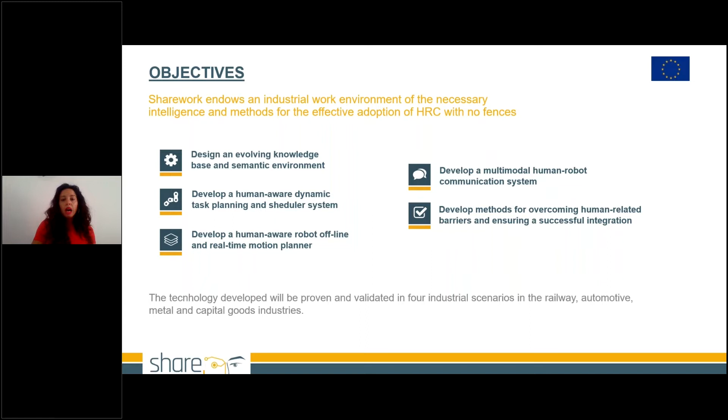Sharework has different objectives. The first one is to design an evolving knowledge base and semantic environment, then to develop a human-aware dynamic task planning and scheduler system, and a robot offline and real-time motion planner. Everything is possible thanks to a multimodal human-robot communication system, and we are also developing methods to overcome all the human-related barriers and concerns that can arise in this field.

Regarding the methodology, the technical activities in our project have been divided into 4 different main areas. The first one is perception. Thanks to different kinds of sensors, the system is capable of recognizing the environment and also the presence of humans and operators. The second area is dedicated to motion planning.

Thanks to our models, the robot is able to recognize what the operators are performing, so which tasks they are doing, and in this way organize itself to have a dynamic planning and scheduling of the collaborative task.

We also dedicate a part to safety and security, especially a module dedicated to safety for humans. Then we have one dedicated to data security, continuous evaluation of ergonomics, and finally operator training with augmented reality.

And finally, as I said before, everything is possible just thanks to the human communication among robots and operators.

So in our project, we have 4 different use cases. The first one is dedicated to the railway sector, led by Alstom. Then we have the metal sector, in which we have Cembre, capital goods, which today will be represented by Goizper, and the automotive one by SEAT.

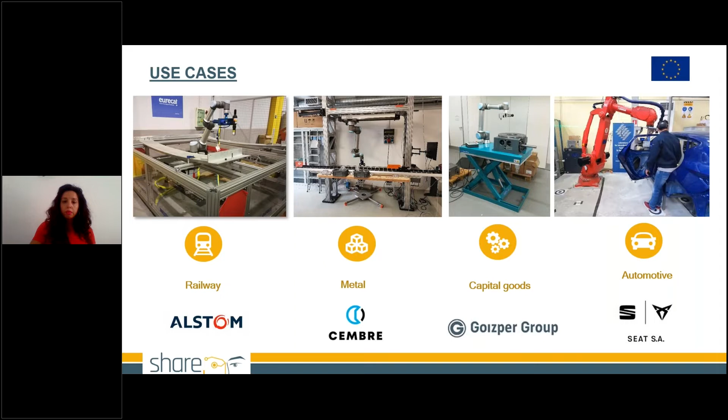So now we are almost at the end of the project. The project will finalize in October, so we are already in the final phase of implementation. And this is why we are here today. Today we are going to see how all the technical activities that have been performed during these 3 and a half years will be integrated directly into the industry.

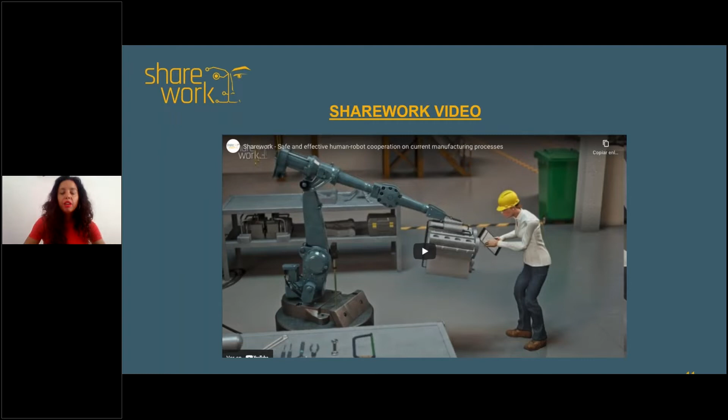In the age of Industry 4.0, the industrial landscape is being transformed by technologies, allowing factories to be more connected and automated. Industrial robots have evolved considerably during the past decades, improving in productivity, efficiency, and security. But they are still not flexible enough to coexist and share production tasks with humans.

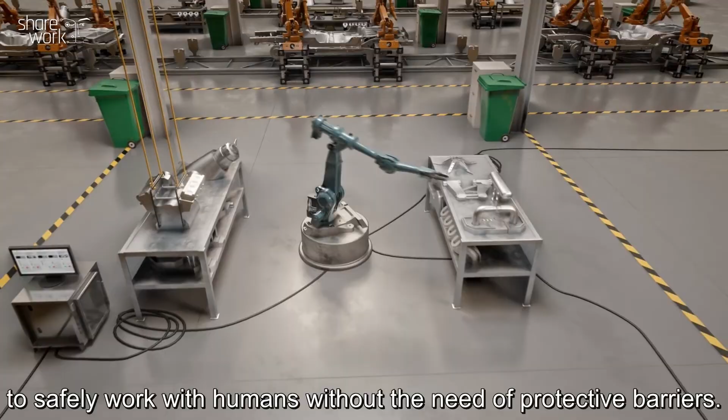The EU-funded project Sharework aims to provide robots with the necessary intelligence to safely work with humans without the need of protective barriers. Thanks to Sharework, industrial collaborative robots will be capable of understanding the environment and human behavior.

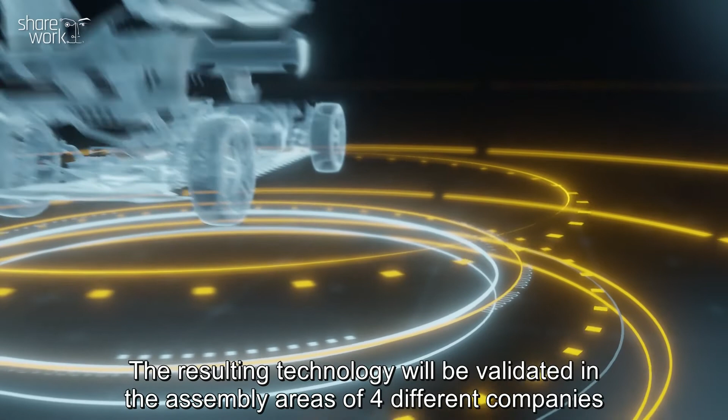A solution to boost process productivity and improve workers' well-being with better ergonomics and safety at the workplace. The resulting technology will be validated in the assembly areas of 4 different companies of the automotive, railway, metal, and capital goods manufacturing industries to evaluate its applicability in different industrial processes.

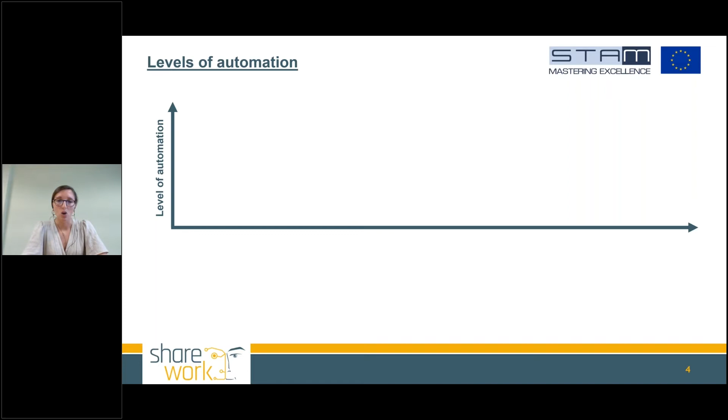Starting from some basic concepts about human-robot collaboration, we can say that generally we can divide the manufacturing process into different categories depending on the level of automation. We can start from a level of zero automation, that is manual manufacture, and arrive to a level of fully automated production lines. In the first case, the main character is the human operator, while in the second case, the work is completely carried out by robots or automatic machines.

Each different type of manufacturing has different features depending on the skills of humans on one side and robots on the other side. For example, manual manufacture is flexible since humans are able to adapt to changes, for example in the product they are manufacturing. Human manufacture also has dexterity, since human hands are able to perform complex tasks and manipulate different types of objects easily. Then, of course, there is the decision-making capability of humans.

Regarding some drawbacks of manual manufacture, humans can make errors, and there is the health risk of operators, mostly related, for example, to ergonomics or to performing heavy tasks.

Regarding full automation instead, the advantages are increased speed and quality of the products due to the introduction of robots. Regarding cost, robots are cheaper than humans, but they require a high initial investment. Another drawback can be the limited adaptability of robotic solutions that are often tailor-made for specific processes and cannot be adapted to changes. In this context, human-robot collaboration is born to fill the gap between these two different kinds of manufacturing processes.

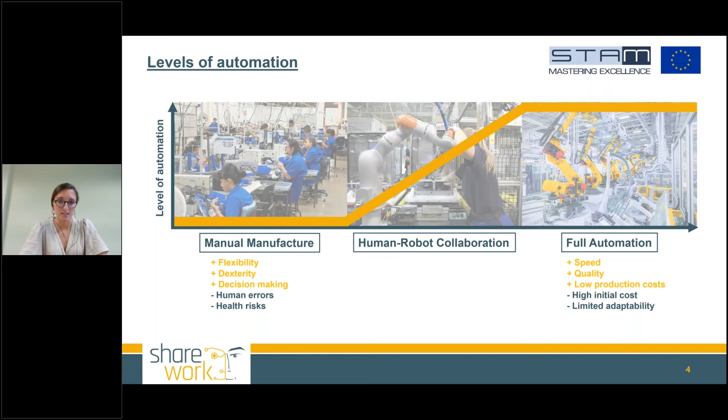But what is human-robot collaboration? We can say that human-robot collaboration is when humans and robots share their workspace. The robot helps the human operator in the most uncomfortable, non-ergonomic, and dangerous tasks, while the human operator works as a supervisor and in all the tasks which require human skills.

So robot and human can work together, and in this way it is possible to integrate the advantages of both manual manufacture and fully automated production lines. Each one brings their own features to the collaborative process. The robot aims to increase efficiency and productivity, since robots are really fast and very accurate, while humans bring flexibility, dexterity, and cognitive capabilities to the process.

Going into more details, there are 5 different ways of interaction between human and robot, and they depend on how they share their workspace. We can start from fenced robot, where there is a fence separating the workspace of the robot and of the human. In this case, no contact between them is possible.

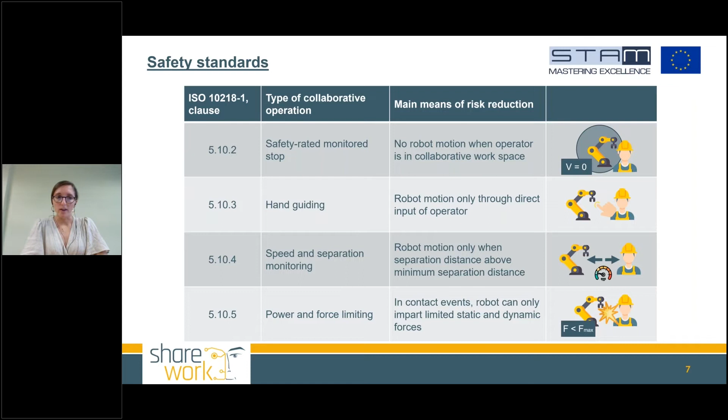Collaborative scenarios should include at least one of these 4 safety modes.

One last aspect I want to introduce today about human-robot collaboration is collaborative robots. Collaborative robots, or simply cobots, are robots which have been specifically designed to work with human operators. They are characterized by technologies which allow avoiding any injuries in case of collision with the human operators. Some of these technologies are, for example, force feedback, collision detection, or even soft and round edges of the robot.

If we want to compare robots and cobots, we can say that robots are ideal for large companies producing large batches of the same product for years, while cobots are designed to work with low volume and high mixed production, where the robot is often reused in different processes.

Then robots have complex deployment because they require extensive programming knowledge to be set up, while cobots are easy to set up even by users who don't have extensive knowledge in robot programming.

Then robots are not safe without protection, so they require a safety fence to keep the human worker outside of the workspace of the robot, while cobots are designed to work with humans, so they don't require fences and the human is safe with them.

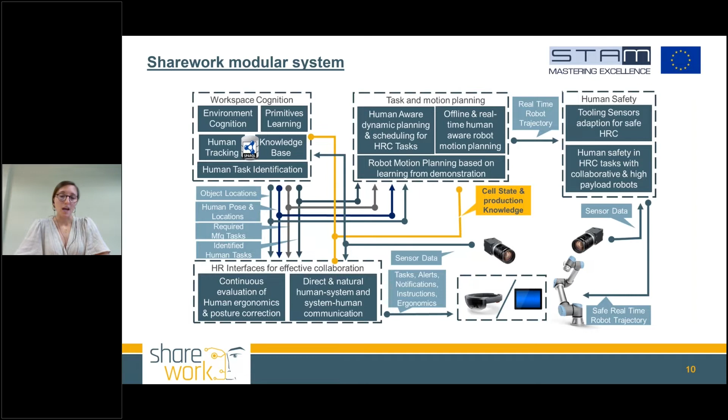The Sharework project aims to create an innovative industrial work environment characterized by the necessary intelligence for the effective adoption of human-robot collaboration without fences. The system is modular and composed of 14 different modules developed by the different partners of this project. The modules can be grouped into different categories: workspace cognition, task and motion planning, human safety, and interfaces for effective collaboration.

These different modules interact with each other and with the surrounding environment, like with cameras, interfaces, or the robot. In all these categories, we take into account the different aspects of human-robot collaboration. So going deeper into each category, the first one is workspace cognition. The purpose of this category is to generate information from the surrounding environment and from the data captured by cameras and other sensors, so the system is aware of the environment and understands where the operator is and what the operator is doing.

We have a module that computes the real-time trajectory of the operators, that is the human tracking module. Then we have a module that identifies which task the operator is carrying out, the human task identification. For example, you can see in the picture that the system is able to understand that the operator is spreading silicone.

Then we have the environment cognition module, which allows detecting and recognizing objects inside the workspace, for example working tools. And we have the primitives learning module, which allows recognizing gestures that the operator is doing, maybe to give commands to the system.

All these modules and the information they capture are used to update the knowledge base of the system, which represents the knowledge of the whole system, and it is updated in real time with the information captured and computed by the other modules.

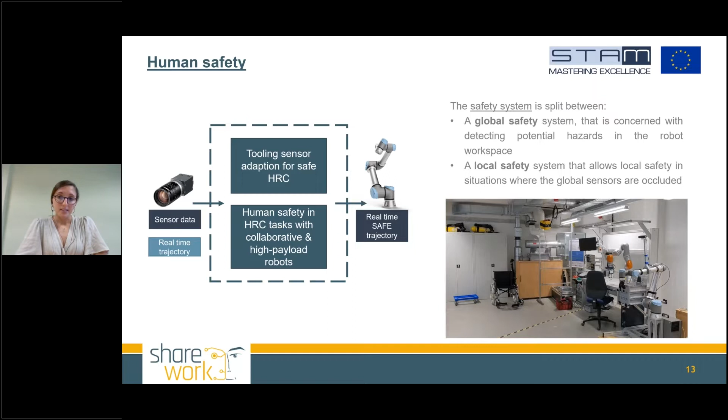The last category of modules addresses another fundamental topic of human-robot collaboration, the communication between human and robots. We are interested in communication on both sides: from the system to the operator, to visualize interesting information so the operator is aware of what the system and robot are doing; and from the operator to the system, since the operator may want to give input, feedback, or comments to the system.

In Sharework, it is possible to integrate different types of devices as interfaces for communication between humans and robots, like tablets, smartwatches, or augmented reality glasses. All these kinds of devices allow effective communication between the Sharework robotic system and the operator.

So to conclude, we can say that in the last decade, many research efforts have been focused on human-robot collaboration, especially in industrial environments. The motivation behind this is that human-robot collaboration is really attractive for industrial scenarios because it combines complementary strengths of human and robotic skills, leading to more attractive work environments characterized by increased productivity, flexibility, and adaptability. However, the wide deployment of human-robot collaboration in industrial applications faces big challenges, and the safety of the human operator is always the first concern.

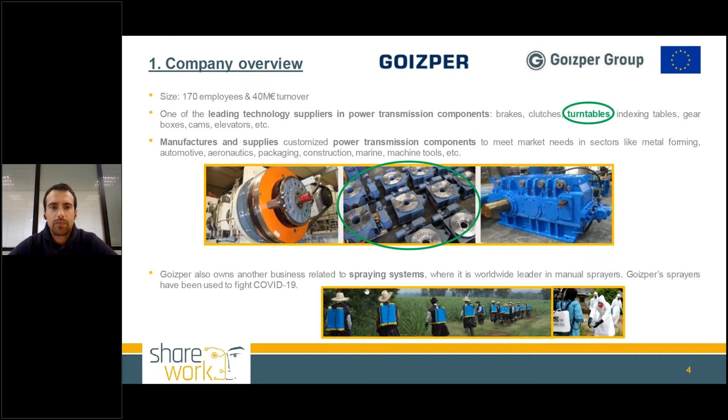So going through the use case, this is a short overview of it. As I told you, this is a turntable, the power transmission component we are manufacturing, and nowadays the assembly process is totally manual. With Sharework, we will reach a collaborative area where the operator you see here working will be collaborating together with a cobot and a servo motor.

We have defined two scenarios where we see a need to improve the ergonomics of the operators, as we will see later on. The first scenario is the bolt tightening scenario, where nowadays it is done manually, but we will have a cobot help. The second scenario is the quality control that nowadays is done by the operator alone, but in this case we will have the help of a servo motor.

The main features of the use case are these four points. As Francesca said in her presentation, the main objective is to have 100% safety. Safety must be assured all the time. But then we also have the real problem, which is the ergonomics of the operators. We have many sick leaves due to operators' pains, back pains, arm pains. So we want to reduce the physical effort of the operators in both scenarios.

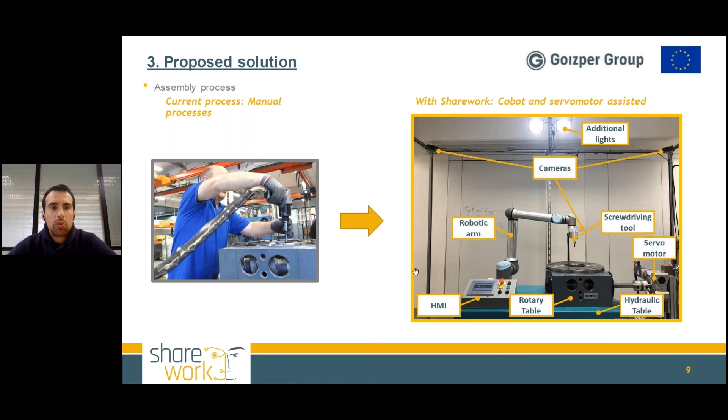As I said before, the first scenario is the bolt tightening. During the assembly of the turntable, several bolts must be screwed. Nowadays, the operator is doing it one by one, and it is not a high load task, but it is a very repetitive task that finally affects the operators.

With Sharework, the next scenario has been proposed, shown here at the bottom right of the screen. The operator will continue introducing the bolts in the holes, but it will be the cobot responsible for detecting whether there is a bolt or not in the hole. After recognizing it, if there is a bolt, it will introduce it and screw it with the correct torque.

For sure, operator and cobot will be working in the same area. So if the operator gets closer, the cobot will slow down, or even stop. As you see, there is an electric wrench at the arm of the cobot that will be responsible for screwing the bolts.

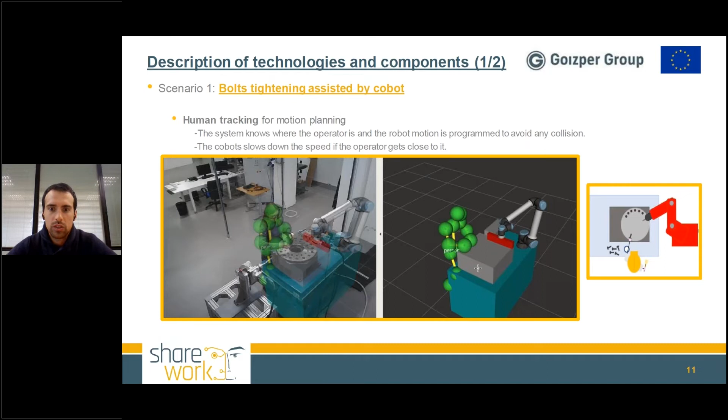So there is a collaboration because they are working in the same area, the cobot and the operator. It is very important to have cameras to track the human all the time, to know where the human is, and to slow down if the human enters the cobot area. As I said in the last slide, safety is first, so no collisions are accepted.

The second scenario is based on the control of the internal components of the turntable. There are some internal components, cam followers, rotating inside these two windows, and it is very important to check how these followers are rolling. For that, nowadays we work this way: the operator turns the shaft, the input shaft, and meanwhile, using the mirror, checks how these cam followers are rolling within the turntable.

The turning of the shaft is very hard. We are talking about 120 Newton meters, sometimes more, and it's a point that we want to remove from this activity. The idea was to have the operator focus only on the quality and the checking of the rolling.

For that, we have inserted a servo motor, because nowadays cobots don't have enough torque to move this kind of shaft. The idea is for the operator and the servo motor to work collaboratively. There will be communication between the operator and the servo motor through gestures, and the servo motor will actuate according to the gestures of the operator.

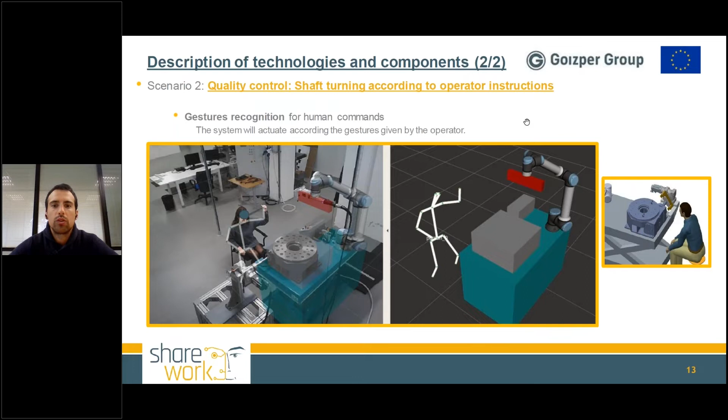Here we can see how the cameras are detecting human gestures. For example, if the operator raises the right hand, the turntable will turn in one direction. If we raise the left hand, the turntable will rotate in the other direction. In this case, the operator is not moving any high load, and is focused only on the quality inspection.

Well, these are the main KPIs. After seeing both scenarios, I'm going to mention only the main KPIs, because there are many apart from this. But as I said before, the main pillar of Sharework for us is safety, and we cannot accept any collision between human and robot, or robot and the environment or any other device.

Then we have ergonomics, our main problem is totally due to the ergonomics of the operator, so we want to reduce the repetitive loads. In the first scenario, it was the bolt tightening, going from 50% to 25% of the cycle time, because the cobot will be the one screwing the bolts.

In the second scenario, we will reduce the high load of turning the input shaft from 90% of the work that the operator does now, to 0%, because the operator will not turn the input shaft anymore.

And finally, we have another main KPI, but let's say it's in a secondary step, that is due to productivity. We want to reduce, if possible, the current productivity time. In the first scenario, we are looking for a cycle time of 60 seconds, and 10 seconds per bolt screwing. For the quality inspection, nowadays we do this task during 1 hour, 60 minutes, and we want to reduce it to 45 minutes.

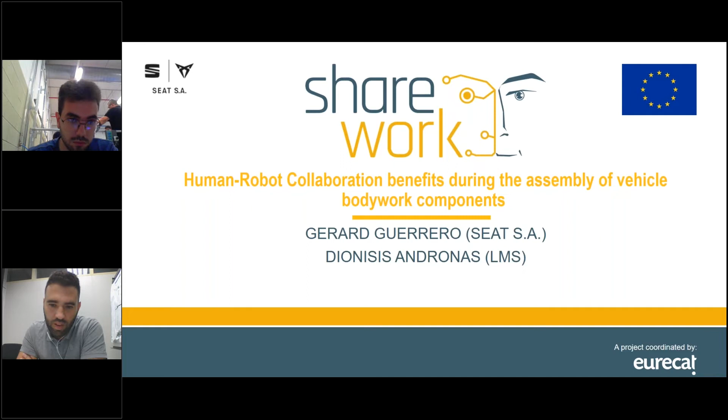SEAT are the only company that designs, develops, manufactures, markets, and sells cars in Spain. Part of the Volkswagen Group, it sells its vehicles under the SEAT and Cupra brands, while SEAT Mo is the business unit which covers urban mobility products and solutions. Currently, here in Martorell, we manufacture vehicles from SEAT, Cupra, and also Audi, and we can manufacture up to 500,000 vehicles per year.

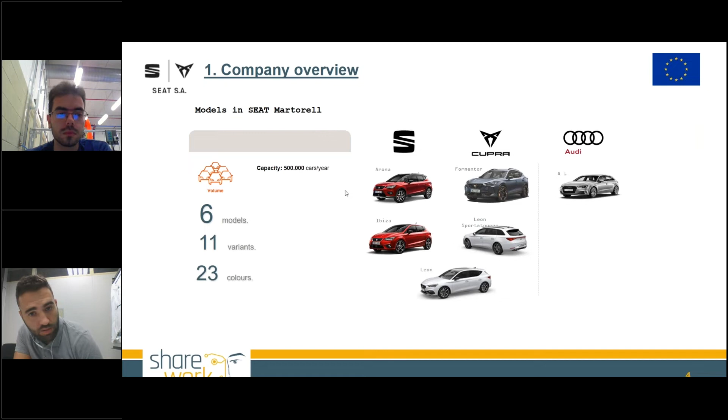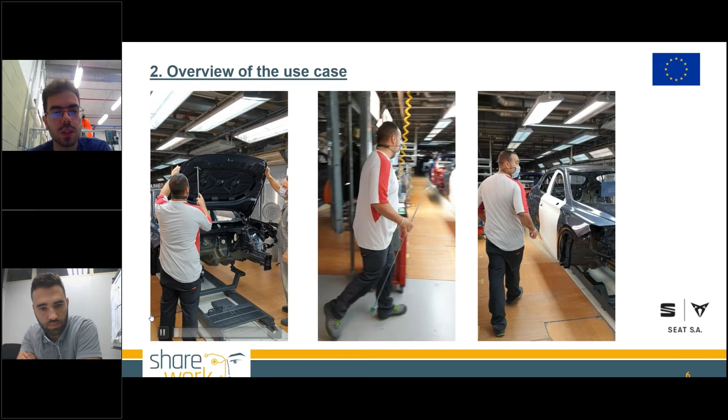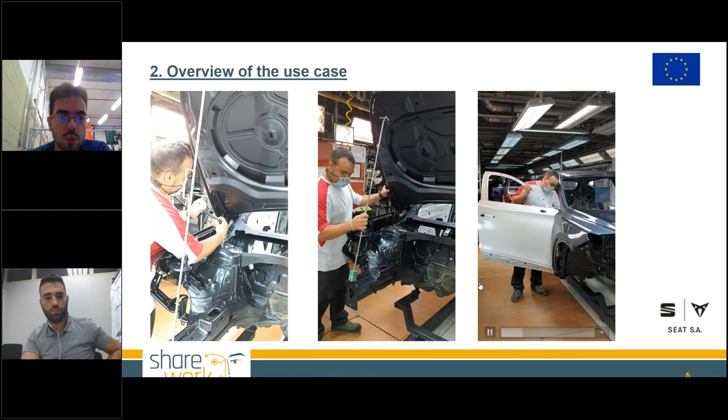Thank you, Gerard. Well, the use case deals with the assembly and also the disassembly of body part components from vehicle chassis as they arrive before the paint shop. The operators have to pick parts from the storage area or the buffers and transfer and finally assemble them on the vehicle chassis as they move on the conveyor system. Those parts weigh approximately 15 kilograms, so we understand that this process for a complete shift emerges serious problems.

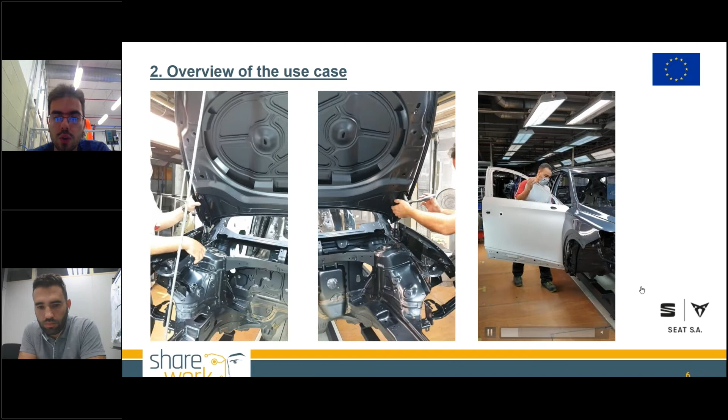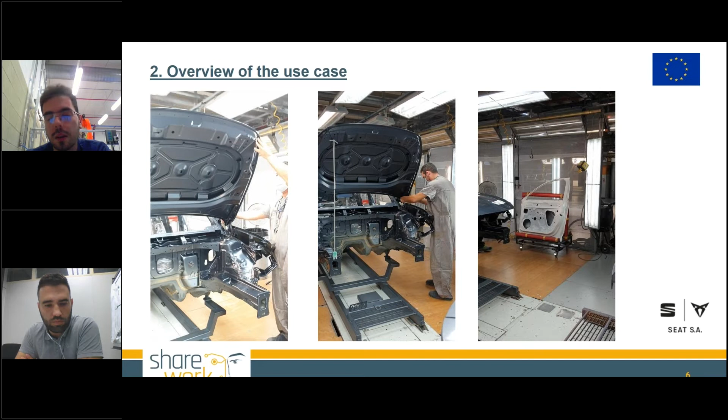For this scenario, we see that the operators are working on the hood, but also on the car doors, and also on the tailgate of each car. They may assemble those parts before the painting process, or they might disassemble those components from chassis that have already been painted, but defects have appeared and they need further processing.

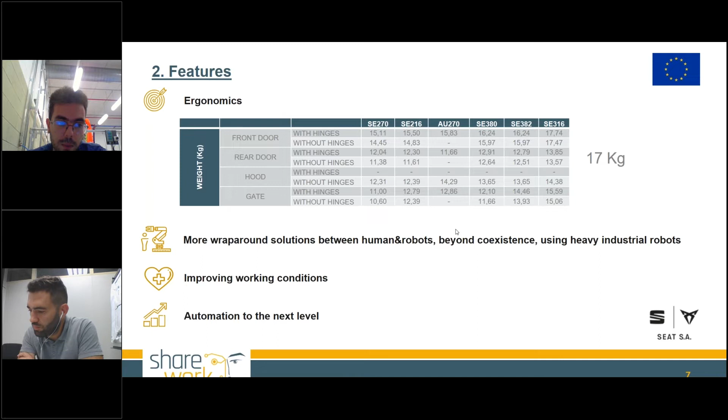Summarizing this scenario, we can see that there are some ergonomic issues. The majority of the parts, as mentioned, weigh over 15 kilograms, with some of them weighing over 17 for some vehicle variants. This emerges serious ergonomic issues. So we want to improve working conditions and also introduce automation for optimizing the process and also optimizing the well-being of the operators.

A few words now about the proposed solution of what Sharework would like to bring in this concept. Here is an overview of the demonstrator that has already been implemented at LMS. We are using a high payload robot to handle the transportation of heavyweight components from the storage area to the chassis and vice versa. At the same time, we keep an operator in the loop because operators have flexibility, and also their cognitive skills are ideal for handling some of the challenges of this case, such as the low repeatability in the positioning of the chassis, and also the high number of variants in the same line.

We have to mention that a huge challenge of this case is the assembly of those components to the chassis, the doors to the chassis, because we have to perform a dual peg-in-hole process in parts whose relative position has a lot of variance. So we have developed a series of solutions within the project. In terms of hardware, we have developed specialized tools for this process. We have designed end effectors that are sensory enhanced in order to support all of the functionalities that we are going to discuss in a few slides, and also they are able to handle the manipulation of variant components without any hardware modifications.

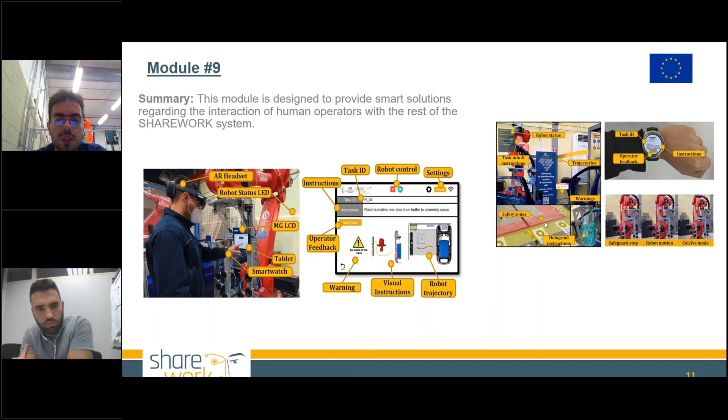Those interfaces now offer a huge variety of available modalities, either for human-system interaction or system-human interaction. Depending on the preferences and also the experience level of the operator, we can have instructions or robot information, safety notifications like trajectories of safety zone arrangements that can be provided to the operator with different means, and also be customized to a huge extent in order to have a more personalized system.

In this case also, we have implemented and tested the data security module of Sharework, which as a module aims at ensuring human safety in case of a detected cybersecurity threat. And for this case, we have also—sorry for the background noise, but we are at the factory.

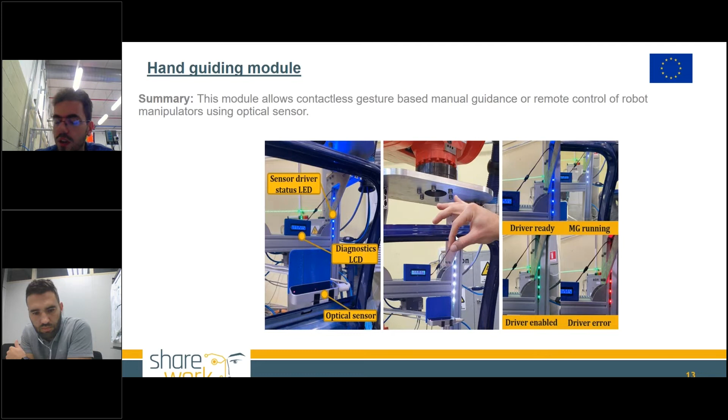In this case, we have also implemented the manual guidance system that uses an optical sensor, and through a pinching gesture, the operator is able to seamlessly manipulate the robot and fine-tune the position in order to perform the peg-in-hole process that was described. We have also implemented the safety system based on Pilz SafetyEYE, with dynamic safety zone reconfiguration depending on the position of the robot and the context of the current executed task.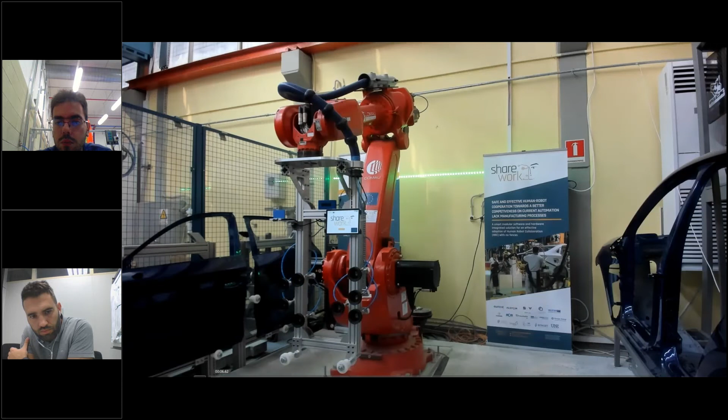Now we have some videos of our experimental setup. Due to timing, I will skip some details. Here we can see the robot being able to grasp the components. At the same time, the trajectory of the robot is visualized inside the operator's field of view, along with the current safety zone configuration, in order to avoid any hazard situation and also avoid unexpected stops of the robot due to human intervention in cases where it shouldn't occur.

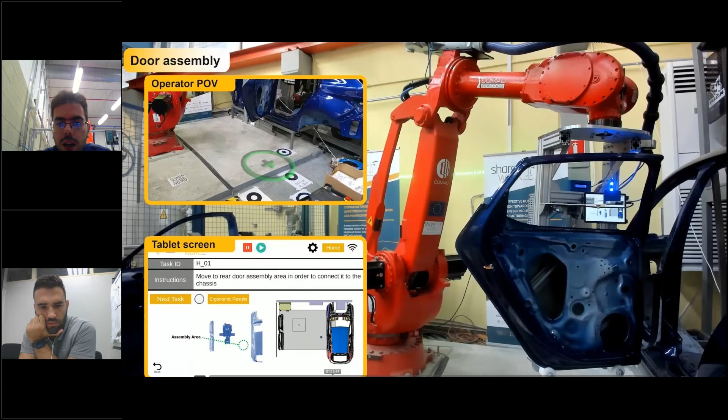Here is the robot transferring the part. We may move on a little bit, and at this point we can see the operator using a pinching gesture to fine-tune the position of the robot in order to perform the dual peg-in-hole process. The operator optimizes the position and finally guides the component to its final position. When this operation ends, the operator performs manual tasks like fastening screws, and augmented information is used to support novice users during runtime operation.

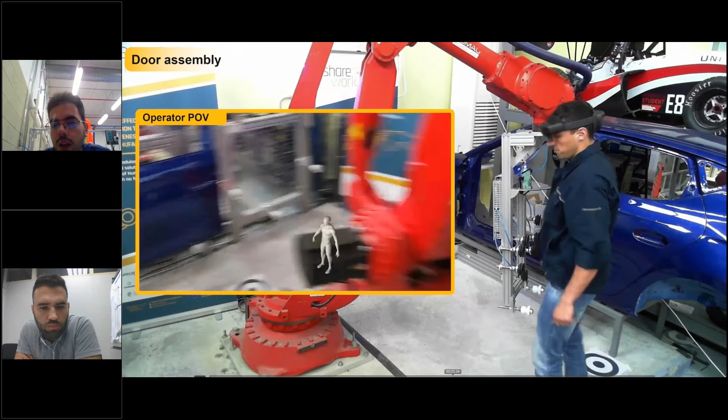Here we also see how the safety zone configurations are dynamically updated. We can see the safety zones from the safety eye and also how they appear inside the operator's field of view. The same process is repeated for the second door.

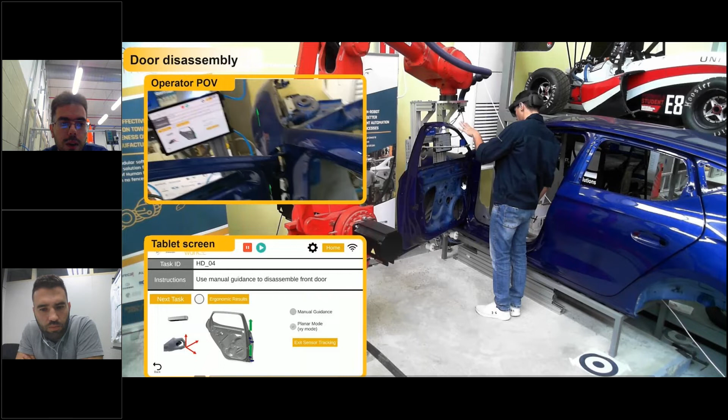I think it's worth showing the inverse process as well. This involves the disassembly of doors from vehicles where defects have been identified. The operator uses the same modules to lift the doors and disassemble them from the hinges, using the interface for direct robot control. The door is manipulated away from the chassis, and as soon as the process ends, the robot moves the component to the storage area. The process is completed for the second part as well.

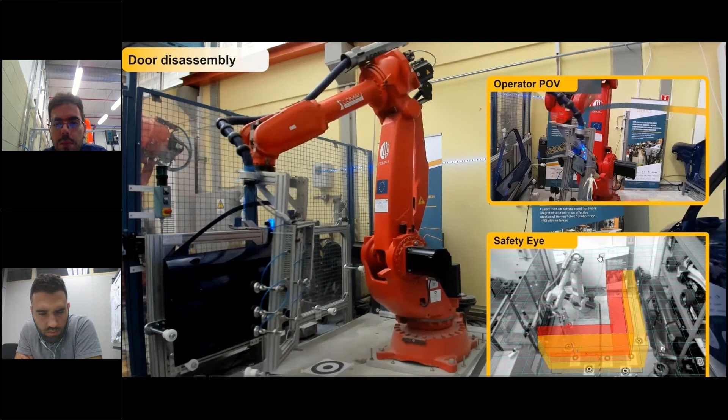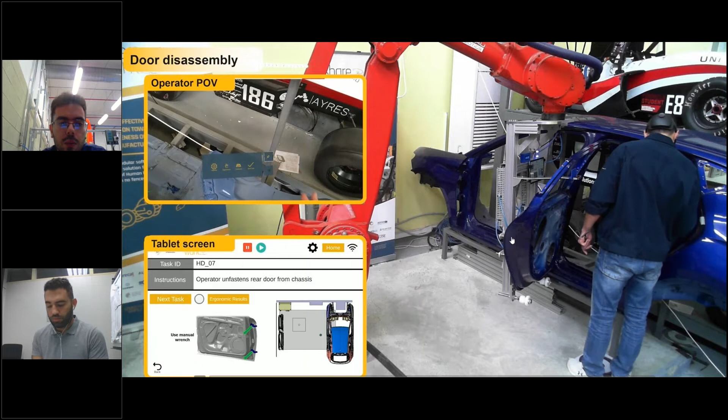All this information can be customized. Those features can be enabled or disabled depending on the level of experience of the user. These options aim to avoid excessive cognitive workload and to create a more personalized interaction pipeline between the robot and the operator.

A few words now about the industrial demonstrator and what we are currently working on. The principle is the same. We have a heavy payload robot, a gripper equipped with a 3-axis force sensor, and perception systems to improve operator safety with the global safety module that Fraunhofer is working on. Here is an overview of the layout we are currently working on. We have the vehicle chassis loaded on the conveyor, and the robot is responsible for transferring parts from a storage area to the chassis, while the operator is only responsible for securing the hinges, both on the hood and the door.

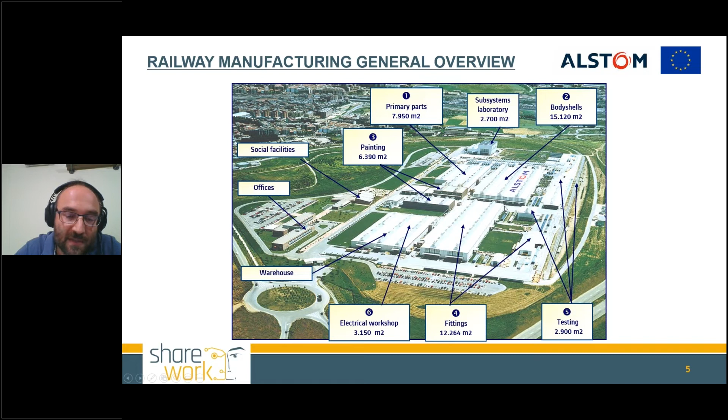After that we go to the painting areas, where the car gets painted, and then to assembly and fittings, where we put electrical and mechanical equipment on the underframe, on the roof, and inside. We finish with an isolated car already completed.

After this we do static testing for one car, then the train set composition, coupling several cars to form a train set. With this we do the dynamic testing, and we have a final train ready to deliver to the customer. This is a very simplified process, just to give an idea.

One point worth discussing is our specificities compared to automotive and aeronautics. Sometimes railway is a bit different, and this explains how we consider ourselves different - sometimes it's good, sometimes it's bad.

We work with small serial batches in general - approaches could be 25 to 40 trains. When we launch manufacturing, we have no frozen design; we make modifications as the process advances.

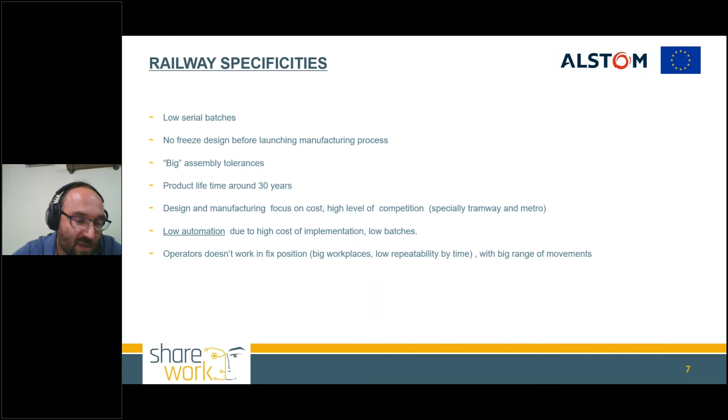We build this lateral frame - lower part, upper part, and door pillars - made of aluminum profiles, assembled by structural riveting.

It's the main target of the Sharework project. When it's already riveted, you do protectioning, and after that you have a quality check. This process runs 400 rivets per train set for one tramway.

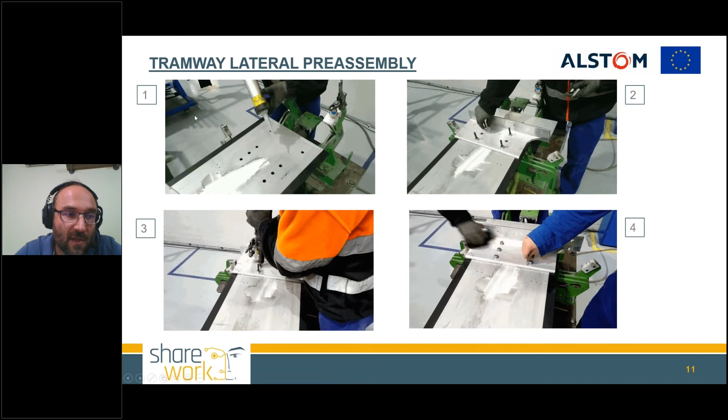Here I don't see it, but you will see it better on the internet, the GIF image. First, it's the silicone spread, put in the place. Second, it's the riveting, fix the aluminum profile. Third, when you apply the tool, you apply the rivet, you break it, and you assemble the parts. And fourth, the quality check.

Here, the first one is a bit slow. Here you have the spreading of the silicone, and this process is done in the four corners of the lateral frame. This is only one corner, this will be done in the four corners. Here it's one corner, two corners, three corners, four corners.

What are the critical aspects of doing this task? As I said before, we have a big range of working area. We need a quality check because the structural rivets are a special process. We have high repeatability of the riveting process especially, and we have some EHS problems with the riveting tool because it's a 5 kilo tool with big feedback when the rivets break, high noise, and you do it 6 or 8 times per corner depending on the assembly, causing ergonomics problems for the operator.

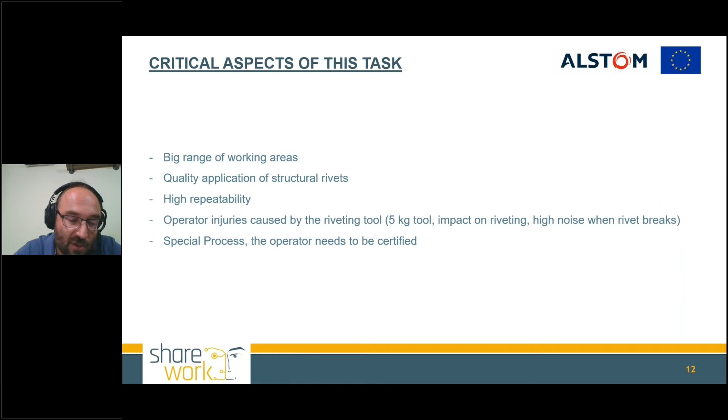As I said before, it's a special process because it's structural riveting. The operator applying this process needs to be certified, and you need to make a quality check of the operators applying this process.

Why are we trying to motivate and use automation on the factory for this specific process? First, reduce ergonomics operators' painful task. Second, increase productivity on the assembly line, reduce the times and make the station more productive. Be the first cobot adoption on the production line. It will be the first cobot working on Alstom. Sure, in our site and other sites we have other cobots, but not with interaction, I would say.

It will also be a way to certify this special process. It's structural riveting that can apply in other workstations, not on the same product, but on other products using structural riveting. If you succeed in applying this technology, it can be reapplied in other processes and other stations. The idea is to have a flexible solution to change to similar processes with low fixed cost to move this solution to another place.

What's the proposed solution? Here it's how we, with our technical partner in the project, Eurecat, decided to collaborate between the worker and the cobot. Here it's when the worker works on this operation, cleaning the assembly areas. Here the cobot spreads the silicone in one of the corners - sorry, applies the silicone, and the operator spreads the silicone.

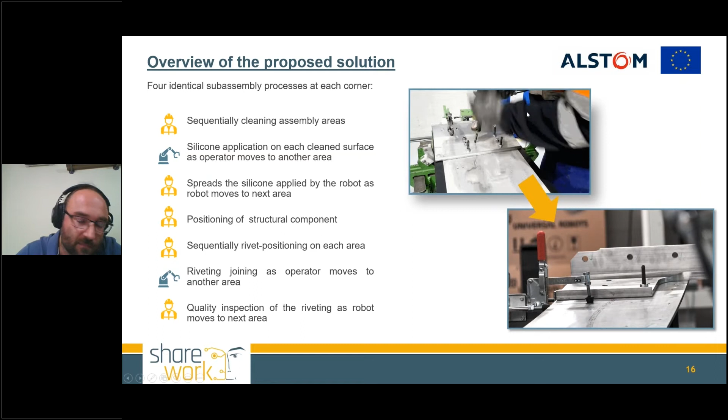Position the riveting, the structural aluminum and the rivets. And after, when it's finished, the robot will go to this corner and make the riveting operation there. This sequence is done in the 4 corners. When the operator leaves one of the corners, the cobot works in this corner, and the operator works in another corner. When finished, the cobot applies its operations in the next corner.

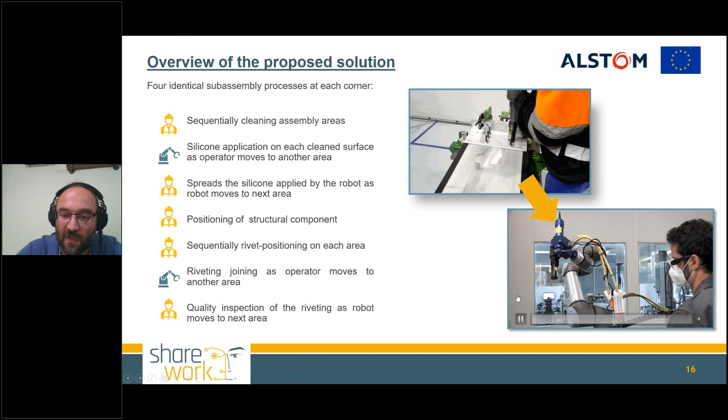Here we have a video. What's the idea of the concept of the operation? Here it's half of the demonstration, and here's how it works - the riveting tool with the cobot applies on the aluminum profiles.

The Android tablet is used for the interface between the operator and the robot. In normal use, it's only to start or stop, or to resolve problems you're facing, but during the process you don't need to use the tablet normally. And after, PCs and networks are mainly used to manage the robot and the cameras.

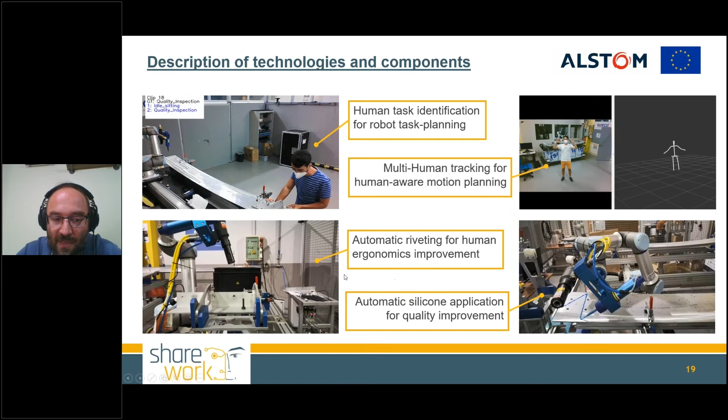Okay, and here we have the same for the spread of silicone. See it here, these are the 2 operations done by the cobot. The other ones, positioning, cleaning, spreading the silicone, are made by the human. And this is repeated for each one of the corners.

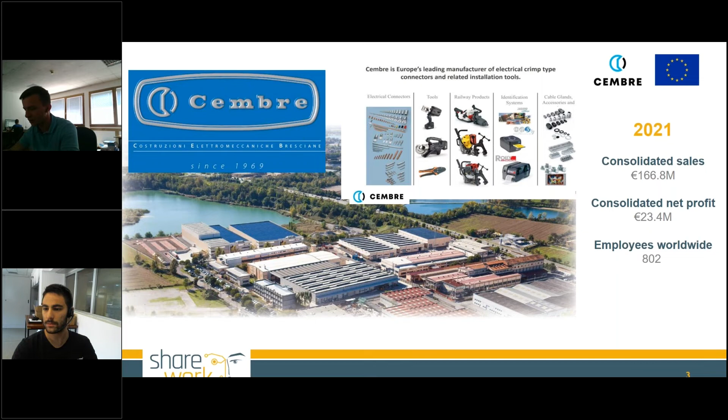At the end of 2021, our consolidated sales were more than 166 million euros, with a consolidated net profit of 23.4 million. Cembre is a group that counts more than 800 employees, subdivided into various plants, also commercial and productive, worldwide. And in this context, the Sharework project is placed, and it allows us to develop new challenging technologies for a continuous improvement of our shop floor.

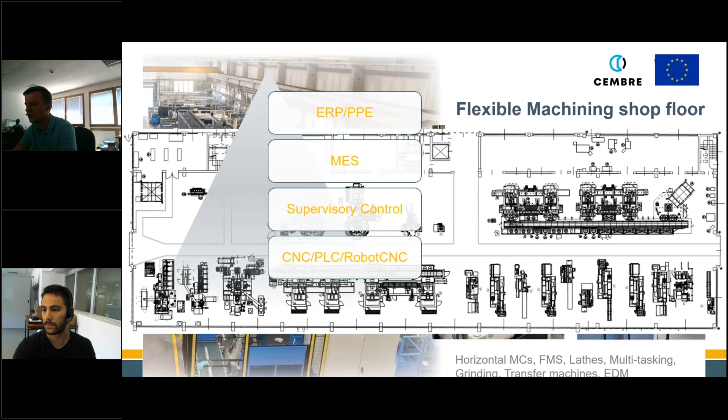To cope with such structured production, a hierarchical control structure is needed, as shown in the picture. This makes ours a flexible machining shop floor that includes horizontal machining, flexible machining systems, lathes, multitasking, grinding, transfer machines, and electrical discharge machining.

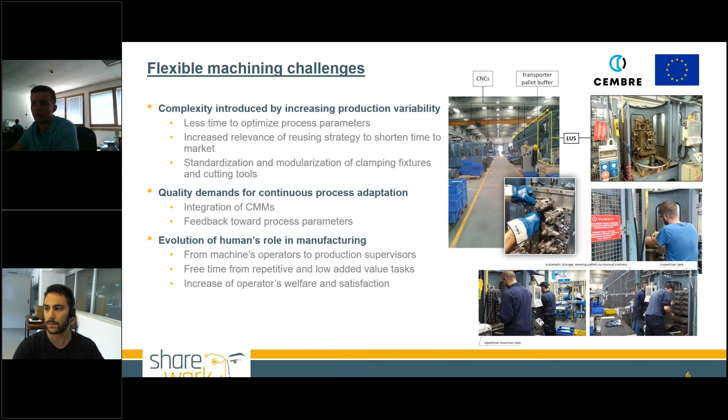So this is a brief company overview, and now I give the floor to my colleague Andrea to present our proposed solution.

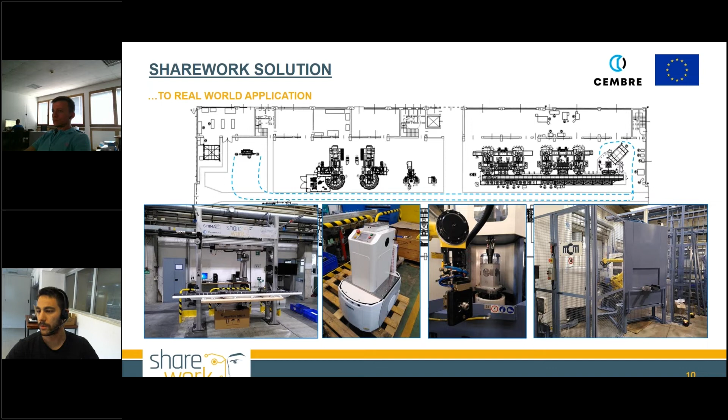Now let's go into details of each area. Starting with the logistics station layout, we decided to build an aluminium main structure with a table on which we placed roller guides, so the single pallets can slide from left to right as single-way roller guides. There are two positions where the single pallets are clamped and locked, so the operators can work on them, and the robot also has defined places where to work.

As you can see, there is the cobot mounted upside down on a linear guide, so it can reach every spot where it needs to work. You also have cameras that can recognize the operators in real time, and thanks to the CNR, the robot is able to avoid the operator in real time because it recognizes where operators are, so it can avoid them or stop if they are too close.

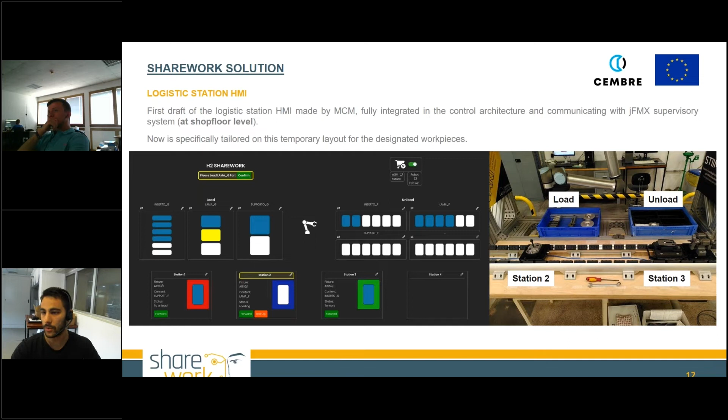Here you can see the first draft of the logistics station HMI. The operator is able to understand what the status of the system is—so if there is a single pallet in station or another, what type of workpiece is being delivered and to where, and so on.

Here you can see one of our operators doing some testing in the logistics station, with single pallets in designed places to be locked. He's interacting with a tablet on which there are instructions to follow, and can decide where to work—whether on one station or the other, which is just for the robot. So you can see they are both sharing their workspace and working closely together. On the right side of the operator, there's another screen where he can check what the cameras are seeing, and if he's been seen by the robot.

And the purpose of relocating this area here is so the operators can just focus on their job, inside the space.

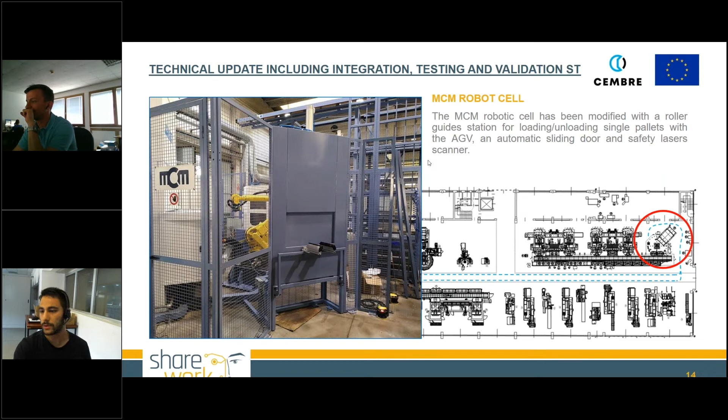Let's see the modification we did at the robotic cell. We modified the receiving area for the single pallets, using the same roller guides we used in the logistics station. There is a sliding door that lets the robot get out to clamp the single pallets just when needed, and safety laser scanners ensure that nobody gets close to the robots while they're moving.

Here you can see a close-up of the tombstone with zero-point fixtures and the robot loading and unloading a single pallet. Of course, this tombstone can also be used manually by the operator.

Conclusion: this project is really a solid first step toward a new working method and philosophy, where people are the main characters on the shop floor. As I said before, I'm really looking forward to it because we saw that the operators are not threatened by the robot and are really interested in using it instead. A dedicated area like the logistics station we designed will increase comfort and ergonomics, as well as letting operators focus on becoming production supervisors.

That's all from my side. Thank you very much.

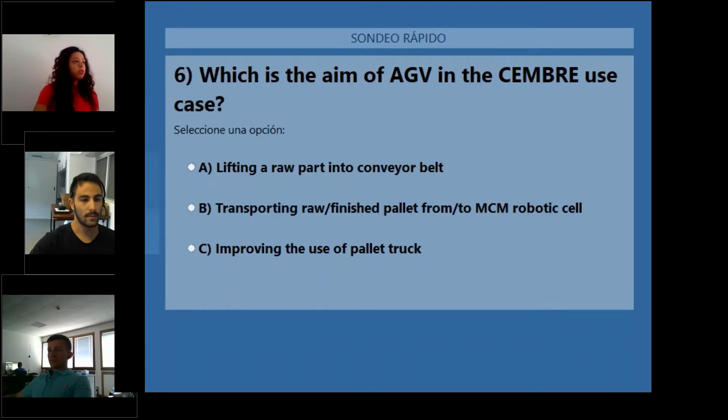So, which is the aim of the AGV in the CEMBRE use case? A, lifting a raw part onto the conveyor belt. B, transporting raw finished pallets from the MCM robotic cell. C, improving the use of the pallet truck.

So here you have the question. Now we have different answers, so it seems not so clear, or we can have more than one option. We're going to discuss it a bit more in detail. 63% of the people have already voted. Let's give just 5 seconds more, and now we close the questionnaire.

Okay, here you have it. 80% of the attendees replied B, transporting raw finished pallets from the MCM robotic cell, and 20% replied improving the use of the pallet truck.

Andrea, Pier Vincenzo, if you want to comment. Yeah, the correct answer is B. The AGV has to deliver raw finished pallets from the robotic cell to the logistics station. This way, this low value-added task is something the operators will no longer have to do. And C is completely wrong - the trucks are manually operated. They're always useful, of course, but they don't interact with AGVs. Okay, so thanks for the explanation.

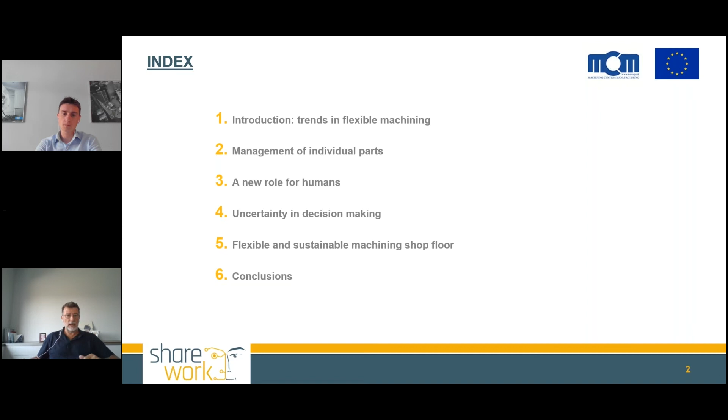And this evolution is in a strict relation with the new requirement for product, process, and production system. So let's start.

We introduce some of the actual trends in the field. Some of them already come out, like the figures that you see on the screen that are coming from Cembre. That is an example of flexible machining with a very deep requirement.

It's a long time that in manufacturing there is a constant pressure on the products towards extensive customization that leads to a reduction of the overall product life cycle and reduction in volumes as well.

So even if the Cembre scenario is already qualified as an extreme flexible machining scenario, things are going worse every year and demanding to explore new ways to cope with flexibility.

And the product evolution requires evolution also on process development, requiring effort to reduce time to market and to reduce the scraps during production. For time to market, this means an extensive usage of digitalization and simulation, but also the capacity to reuse knowledge from previous projects in the development of new machining process.

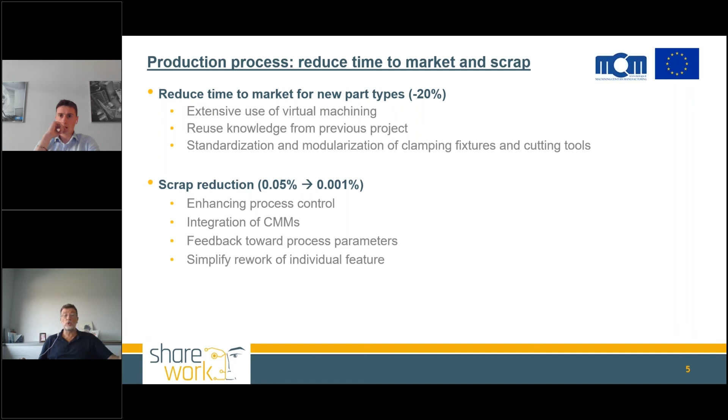For scrap reduction, this has led during the years to enhanced sensorization and better control process procedure, but also the integration of coordinate measuring machine in the standard routing of manufacturing parts, as well as the capacity to feedback from measure to process. And one interesting point, the capacity to rework incorrect features.

On production systems, the need to increase productivity by reducing production cost has long led to the introduction of increasingly standard levels of automation in order to exploit unattended shift.

This trend has become even more evident with the recent evolution of the global market, characterized by an increase in personal costs and crossed by phenomena like reshoring or friendshoring that is affecting Western and especially European manufacturing.

The push toward automation, even in flexible production context, is also redesigning the relationship between man and machine. We already have heard the term evolution from machine operator to production supervisor.

And this will be something that we have to take into consideration, as well as the aspects that are creating relevant requirements in modern manufacturing toward a sustainable and human-friendly working environment.

In addition to safety, which can never be called into question, there are other aspects that are emerging. Above all, the enhancement of the role of human personnel in the workshop.

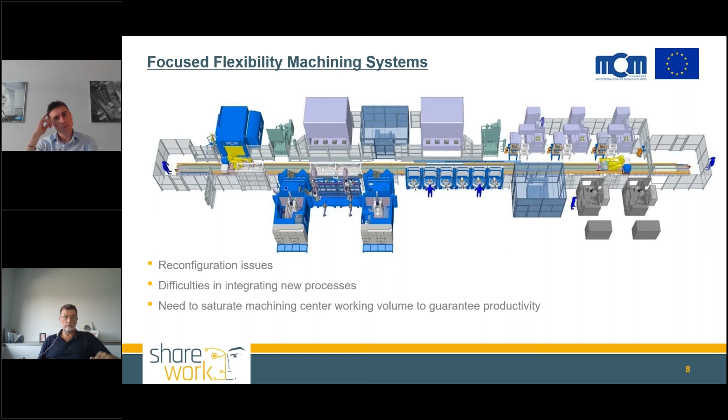But what if we are capable to manage individual parts? This seems a promising path for a generalized capability for a flexible machine.

The state-of-art industrialization in machining requires dedicated multi-clamping pallets. And there are very good reasons related to productivity to have this industrialization.

Since a long time, this approach is hampered by the degree of complexity in the process development and de facto impossibility to partially rework features not in tolerance, because the part needs to be unclamped to move to the control area and then reclamped, and this creates disturbances in the process, not compatible with maintaining tolerances.

But if we are capable to manage individual parts, we can simplify the overall machining process, building it from a reusable individual entity. And when control fails on a specific feature, we should have the opportunity to rework it. And this will reduce time to market and potential scrap. So very in line with the original requirements that are crossing this sector.

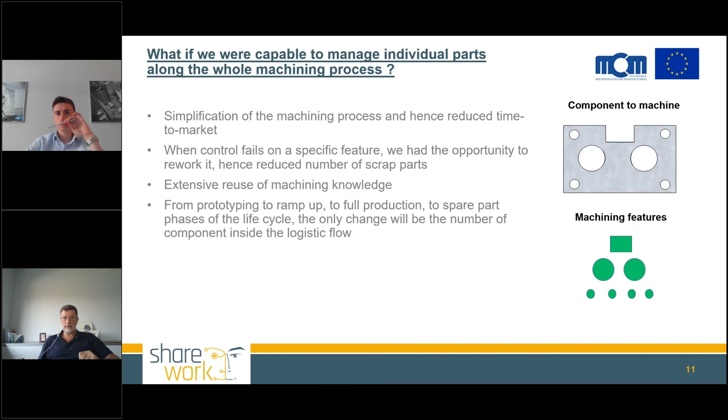But in order to achieve this, we need the support of two major advancements in machining. The first one is a new approach to the development and execution of the machining process, named network part program.

It was derived from research activities on the evolution of the ISO programming language 6983, used to program machine tools since the 50s of the last century. Even the newly emerged standard, ISO 14649, commonly known as STEP-NC, never entered industry due to opposition by the two CNC market leaders, Siemens and Fanuc.

Nevertheless, the concepts behind it found a way to reach the market thanks to the network part program initiative. It enables the creation of a work plan for a single part from reusable building blocks, named machining operations.

This offers the possibility to selectively execute or re-execute a subset of the working steps.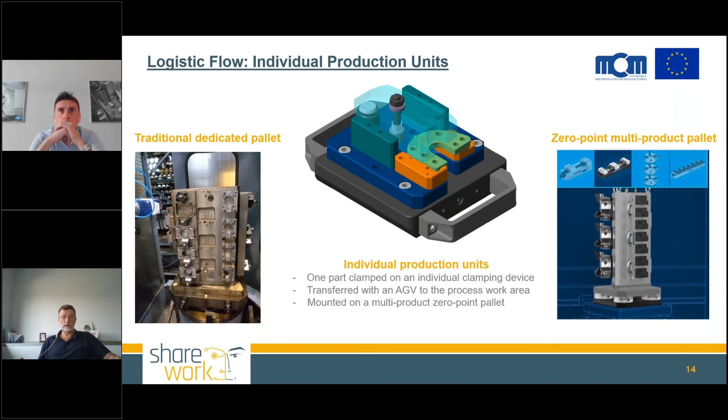Another key aspect of the new proposed approach is related to the role of humans in a machining shop floor. To support the inevitable transition from machine operator to production supervisor, it is necessary that human activities concentrate on high-value tasks, related mostly to control and validation of machined features.

We had examples during the previous presentation of the possibilities to introduce collaborative automation to relieve humans from low-value tasks.

But I want to draw attention to a risk that needs to be mitigated in very flexible production contexts. Many sources of information put a lot of pressure and require cognitive effort, with the risk of information overload. In particular, it is very important to provide a clean interface to inform operators about the task under execution.

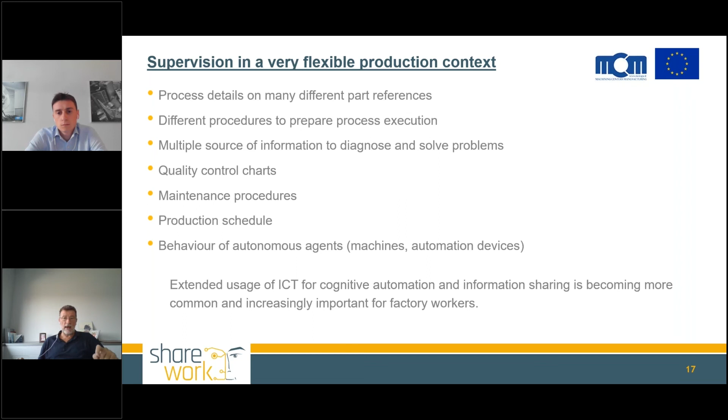But even more important is the capacity to make evident the behavior of the artificial autonomous part.

In the field of operator instruction, we started from paper instructions associated with the part and went through paperless shop floors where documents are shown on screen. Now the tendency is toward detailed preparation and control tasks, presenting procedure details on a computer interface that enables interaction with individual procedural steps.

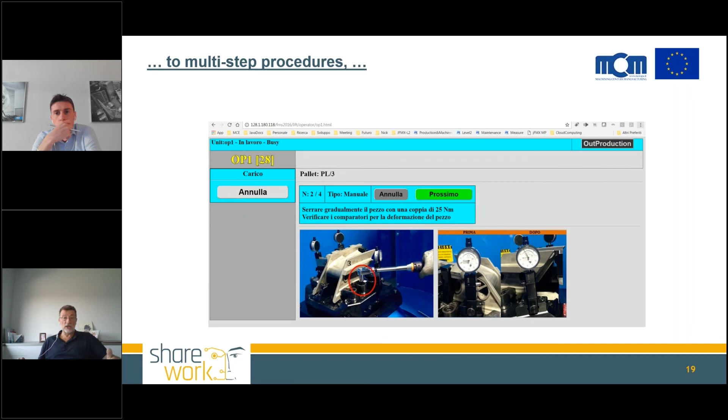The future is associated with the development of robotic partners with interfaces to share not only the working space, but also awareness between human and artificial agents of the current situation related to the task to perform.

So, in a word, we want to create an environment where operators can understand machines' behavior and machines are capable of adapting to human behavior. This is an important aspect of collaborative automation.

The possibility to define explicit models of the activities that take place in the shop floor, process handling and control, and to interact with them at runtime, is one important technology to support this vision.

Another key aspect is related to the development of advanced control techniques capable of recognizing human behavior and generating proper trajectories for robotic arms or automated vehicles, adapted to the presence of humans.

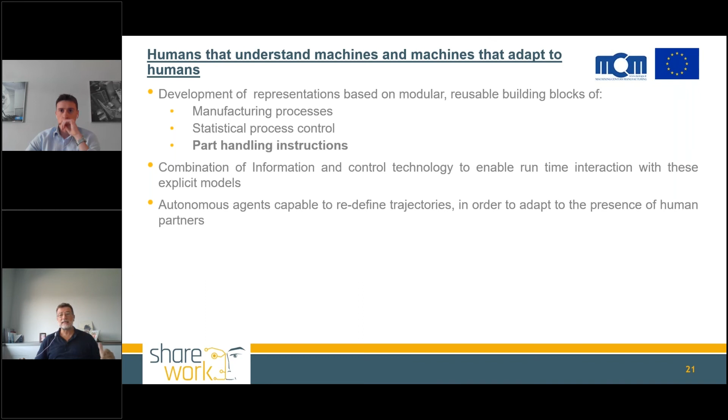In general, it is necessary to cope with uncertainty in control decisions. There are many sources of uncertainty in a collaborative scenario, starting from the uncontrollability of the human agent, which leads to continuous adaptation of the autonomous agent's behavior, and consequently to a reduced capacity to estimate and predict the duration of individual activities.

And this uncertainty moves upward along the hierarchical levels of the control system, making the task of planning and controlling the execution of plans more complex.

So in Sharework, we have introduced a planning and scheduling technology based on timelines that has two major advantages. The first is the capacity to work on a hierarchical description at different levels of abstraction, matching the layered architecture of a manufacturing shop floor.

The second aspect is the integration of planning and execution, relying on the same semantics of timelines. This is of paramount relevance to the dynamic adaptation of autonomous agent behavior to the environment.

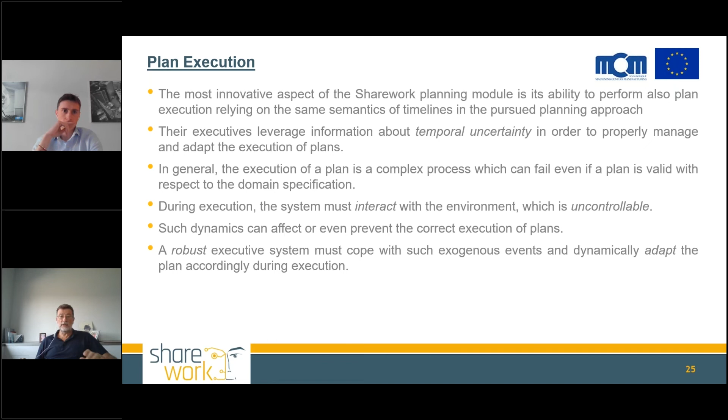This part of this environment involves uncontrollable humans, but also other autonomous agents committed to the execution of different goals. This offers the collaborative automation approach not only a pillar to build real cooperation between human and robot, but also creates the basis to ease reconfiguration and required adaptation in the interaction between independent, autonomous, artificial agents.

Putting all things together, we finally arrive at the vision already presented inside the Sharework use case. Sharework has developed a long-term vision based on a simple but powerful concept: to transform the whole shop floor into an integrated, flexible manufacturing system.

People will move inside this manufacturing system, sharing the space with automation devices and cooperating with artificial and autonomous agents to pursue production goals. Complex activities with high human content will be centralized and moved far from machines, into workplaces that are more comfortable and ergonomic, supported by robotic partners for low-value activities.

Inside this environment, a flow of pre-clamped parts assembled at a collaborative logistics station are moved around to be processed according to routing instructions.

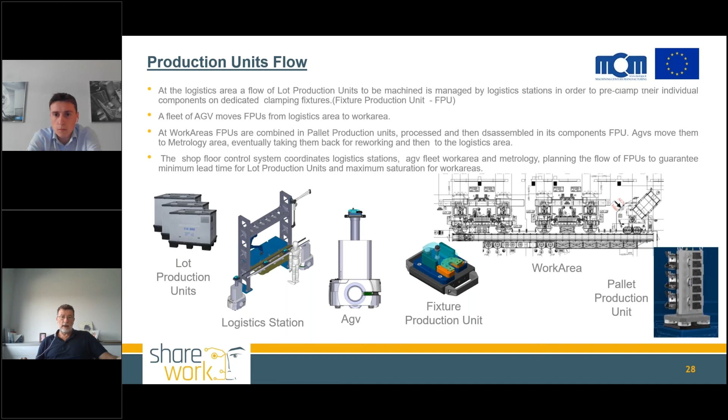This entire shop floor will be controlled by a control system that is hierarchical by nature. Inside Sharework, we have developed the integration of the control of the logistic work area, the integration of the AGV fleet manager, and the integration of the controller of the existing machining work area.

We have also developed a simulation model of the shop floor to validate the overall solution and to estimate how performance indicators are affected by different elements. Now I leave the floor to Filippo for a brief description of his work in the development of this simulation.

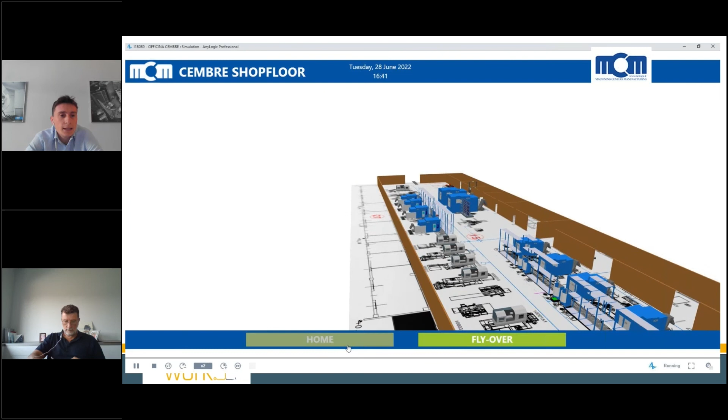Consequently, different priorities of handling materials are needed, with a view to managing small production batches but with a large variety of product. It became essential to foresee possible logistical criticalities, to reduce lead time, and to optimize saturation of the production units. This is the purpose of the discrete event simulation shown here.

For this demonstration, the manufacturing facility of the Sharework use case was virtually remodeled. The layout presented here shows the units directly involved in the Sharework project, such as logistics stations and the fleet of AGVs, as well as all the production units already installed and working at the Cembre facility.

The flyover of the video wants to clarify the meaning of the production units involved in the Sharework plant. The model allows you to perform multiple what-if analyses, simulating different production scenarios.

Depending on the scenario to be simulated, it is possible to define the input and output of the system, such as throughput rate of the code to be processed, saturation of each production unit, number of AGVs to be allocated for each mission, the heat map, runtime of the AGV path, and all the variables that directly depend on the units involved in the simulation model.

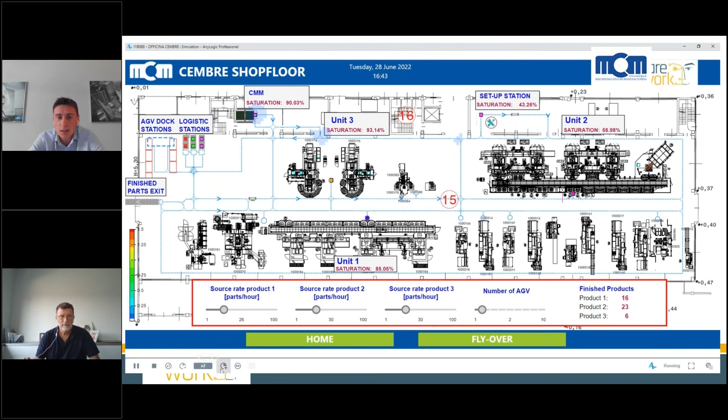Thank you very much, so some final words. We were the only ones who didn't take the correct timing, sorry for this, but implementation of a logistic flow of individual parts is the basis for a generalized approach to transform a machining shop floor into a flexible and integrated manufacturing system.

We have shown some of the required advancements over current industrial practice. Moreover, it is a promising context to support the evolution of the role of humans in manufacturing.

One of the key problems to solve is the increased complexity and the injection of uncertainty in the coordination of multiple autonomous agents. For this reason, one of the main topics of research activities for us will be related to the development of a reactive planning module at the shop floor level. Thank you for your attention.

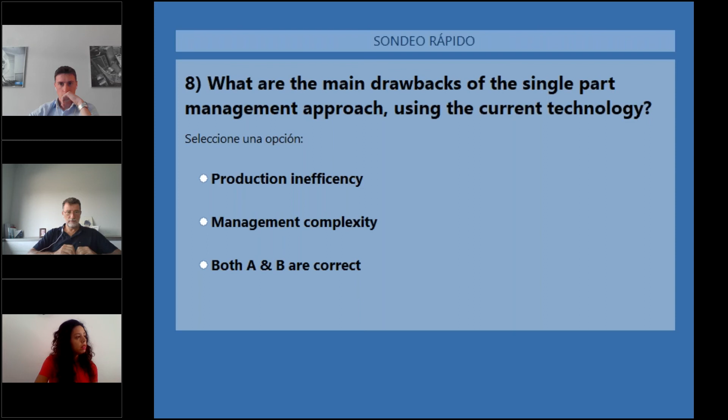Yeah, so here's the answer. I expect this answer, I have doubt by myself, the one that gives the question. I know the most correct answer could be both A and B, but nevertheless I did underline actually management complexity. So I think it's good that the attendees were putting attention to what I said. So thank you very much. Thanks a lot, Giuseppe.

I mean, it's crazy how many things you have to take into account apart from the technical aspects, also the position and also people that can move. I tried to pack a lot of concepts.

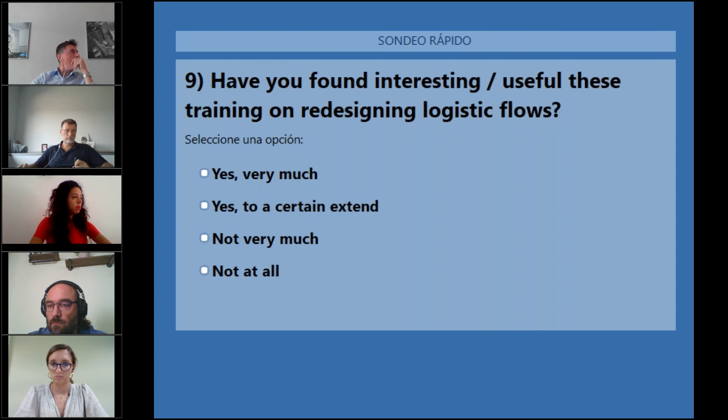So I would like to start just with a more general question to all the industrial partners. In general, how would you say, which are the benefits for operators and which are the benefits for businesses when we are speaking about collaborative robotics? I don't know if there is anyone that would like to start with a quick answer.

Yes, but I tried to focus all my presentation on these two aspects. And I think that what is coming out is a new way to proceed with automation for manufacturing, a different approach. Since now we have concentrated on automating all we can, and then when we are no more able, we let the people enter the picture. This should change. We should start from enhancing the value of the work of people, trying to keep away from them low value tasks, and this is completely different. Also, for the flexibility that this new automation can provide, this is very promising for the reconfiguration aspect that will become more and more important in our shop floor.